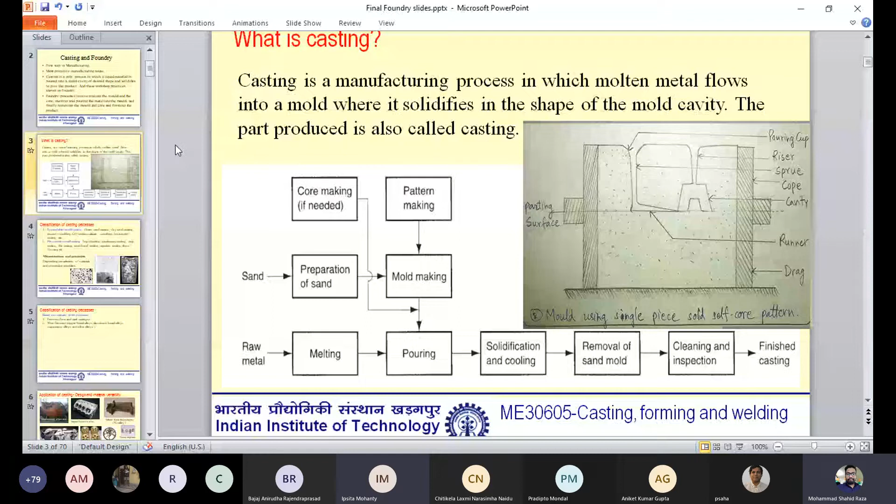Got it? So can we play the video right now, because I think students will understand easily if they see the video? Before that, let's show some application part, because there were lots of slides, so we thought we should complete some of the slides, then go for the video. Let's have three or more slides, then we will go to the video.

So now, classification of casting. I told you what we are doing - we are doing casting with the help of a mold. That mold can be permanent or temporary. Temporary means once you make a product, you can break the mold and make a new mold for the next casting. But in permanent mold casting, the mold will not break after each cast product - you have to keep it.

And how does this happen? This can only happen when you select a mold material which has a very high melting point, and the cast material has a relatively much lower melting point, so it will not damage the mold, and it is also easy to take the material out of the cavity. If you can take out the material without breaking it, then you can keep the mold.

So on that basis, we have two types of mold: expendable and permanent. Expendable basically uses green sand casting, as well as other molds like CO2 molding, sodium silicate molding, investment casting, etc. In permanent, we have continuous casting, ingot casting, strip casting. These are the casting processes that industries follow for continuous or large batches of products.

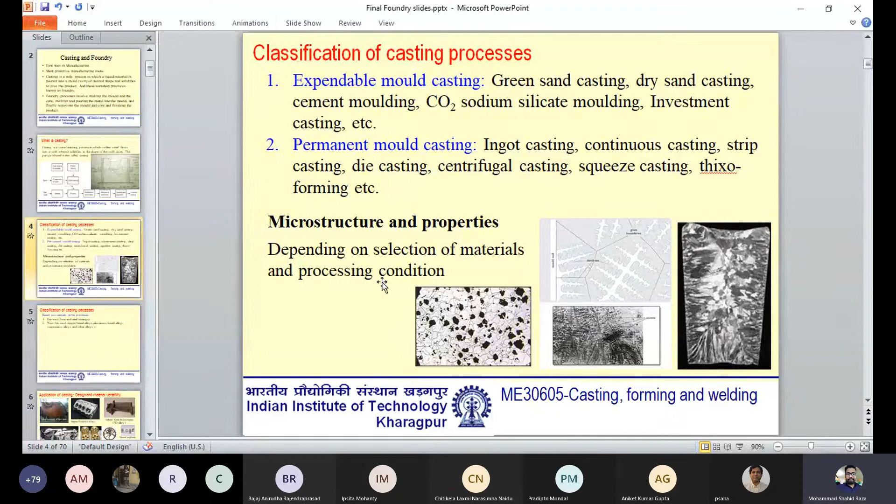Now, previously I told you casting can be divided into two parts based on mold. Now, based on the raw material you want to cast, we have two types of casting: one is ferrous, based on iron and steel, and the other is non-ferrous, like copper, aluminum, etc. For your class, we are going to cast an aluminum-based product.

Now see the applications - just look at the size of the product. If it's a dental implant, it's very small. If it's a pump housing, it's quite big. So the range of applications of casting is quite vast. The product size varies from very small to very large, and the product quantity varies from a few numbers to many numbers. So it has a lot of applications.

Even if it is a primitive process, why are we going to make so many products using casting? Just because... please mute your mic. Please join the modules, both of you, and mute your mics.

So these products have large variations, but still we go for casting because it is economical - it practically gives you your desired product at an affordable price. So we are going for casting.

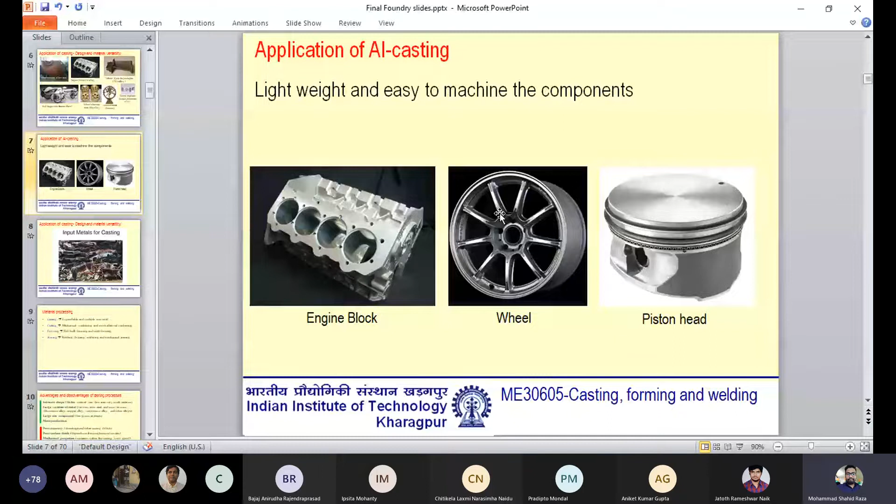These are again some applications of aluminum casting, where the wheel base is made through casting, along with the piston head, engine block, and all these parts.

Now, if I ask you how you get raw material for casting - you can say, sir, we know about mining of metals, like iron ore mining, aluminum mining. From there, the oxides of the metals are present, and we do some reduction process, and finally you get the final raw material for casting.

As well as recycling - in casting, we can use recycled product after purification, obviously, and use it for making another product. This is also a good aspect environmentally - you are recycling the materials, and that will decrease the load on the environment.

Now, material processing. This is a common step to help you understand how other processes are related to casting. So casting, basically, we use a mold to make a product, but that product may not be exactly what you need. There may be some dimensional error, so you can go for cutting. How you can do cutting mechanically, like you did during the lathe experiment, you decreased the length of the job. Cutting operations are always there, and non-traditional machining is also a part where you can do cutting, like laser cutting.

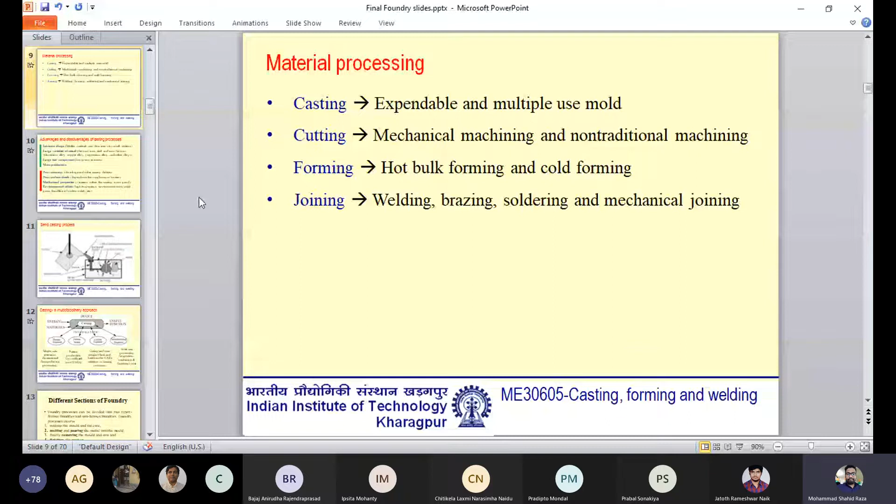Now, advantages and disadvantages of casting. As I told you, whatever pattern you keep in the mold -- that pattern may be very simple, or it may have a very complicated shape. You can have 5 parts added in the pattern, belonging to 5 parts -- that also you can do. So intricate shapes can be formed.

Let's say you have to form a shape which is very complex, and I ask you to do it through machining. Maybe you can do it through machining, but that will be very difficult, and damage of parts can also take place. Why? Because the shape is somewhere very thin, somewhere very thick, somewhere the strength is very low, somewhere strength is very high. So once you machine it and apply pressure, it can get damaged.

But in case of casting, that is not the case -- the material is in molten form, so whatever shape you give, it will form. Again, large varieties -- I told you, you can have very small to very large sizes, and you can select any material. Large size components, again the same point, allow mass production. So these are the advantages.

Disadvantages: poor accuracy. Why? Because of shrinkage and casting defects. Shrinkage -- as you know, any material that gets heated or has its temperature changed will either expand or contract. This is always there because it has a coefficient of contraction and coefficient of expansion property. It means temperature change will change the size, although it may not always be visible to you.

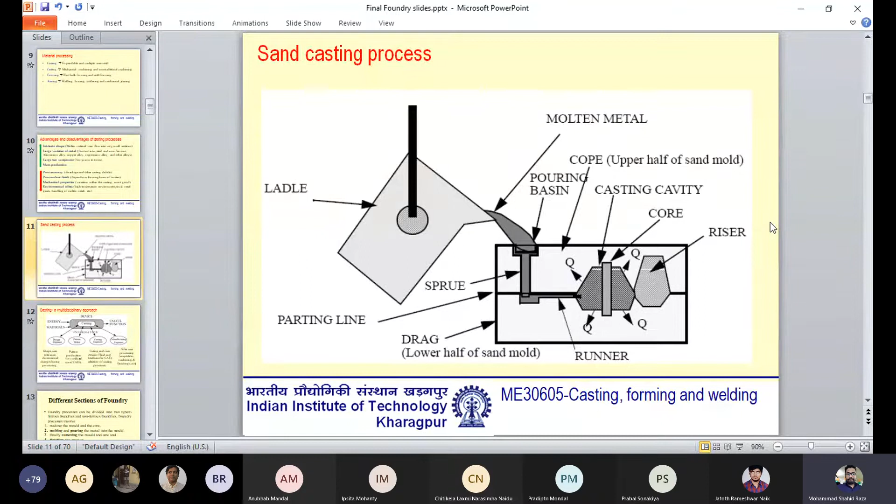We can come back again to the riser. There are riser slides.

Casting is a multidisciplinary approach. If we are going to cast a material, we need a design engineer who will tell us the shape and size of the casting or how the dimensions can change. The contraction amount is this much, so add 5% or 6% more to the size of the pattern to compensate for the dimensional changes. The pattern maker will take the data from the design engineer and make the pattern. That pattern can be made through different materials, and it is given for the casting process. Then the casting engineer will design the mold and its gating system, how the heat transfer will take place, and how we can place the core, whatever is required for the process.

At last, after the casting process is complete, the manufacturing aspect comes into picture, and we do the machining, finishing, and inspect the material for any type of defects. This is the chain through which a casting goes through.

Now, different sections of foundry - ferrous and non-ferrous - we covered. The foundry process involves making the mold and core, melting and pouring the material, and finally removing and finishing the product. This is like the previous slide only.

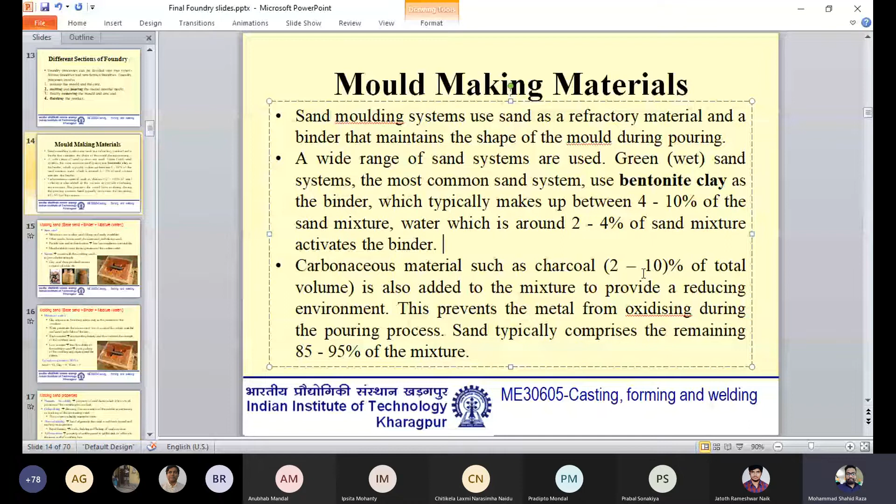Again, what sand are we using? Silica sand. Why? It's cheap and easily available. Other sands are also there. Why do we use sand? It's a ceramic type of material and resists very high temperature. We should know that it resists very high temperature, and the molten temperature of the material is high, which is why it's a good choice for the mold material.

Binder - clay, cement, organic oil - a lot of binders are there. This is self-explanatory; you can understand this slide. Moisture, again, water - why do we need water? So that it can act as a binder between clay and sand.

Increases the content, does reduce strength. High content, lower strength; lower content, less flowability. So this is okay.

Now molding sand properties. Once you prepare the molding sand using water, clay, and sand, it has some desired properties like plasticity or flowability. What is that?

Once you start ramming, or once you place the sand in the box, it should flow into all portions of the box. That property is called flowability. How can you assure this? By applying pressure with the help of some material, called a rammer.

Collapsibility means allowing free contraction, or a method to avoid tearing or cracking of the contracting material. When the material starts to contract, it should help it contract and should not get stuck with the material. So that we call collapsibility.

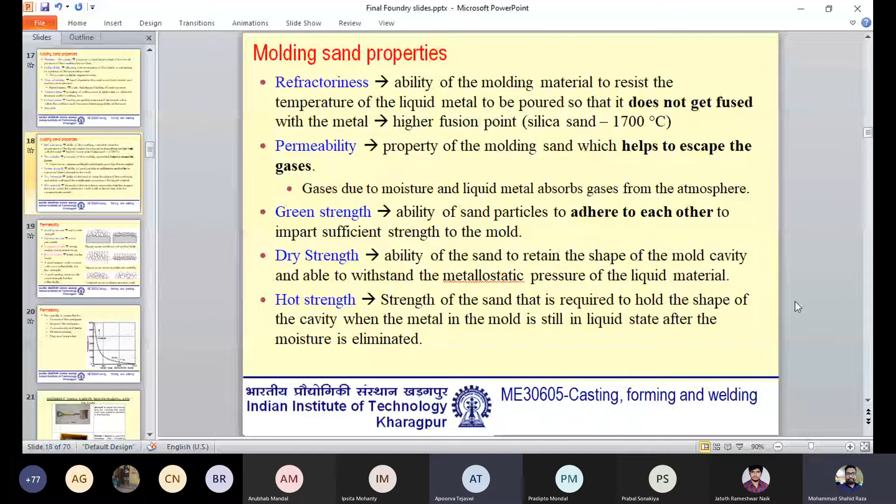Question: how is adhesiveness used? Meaning, if we pour the molten metal in the mold, how do the sand particles stay in place? See, once you pour the liquid material in the box, what happens? Immediately the moisture in the sand particles present in the periphery will evaporate.

Once it evaporates, that's where the liquid metal's property comes into picture - dry strength, meaning it should not collapse once you place liquid metal inside it. The property of sand is such that when it dries out, it can still hold its shape and size. Because once you place liquid metal, what does it mean? It means the moisture will go out.

Moisture will go out, then what will remain? Clay and sand will be there. So that binding property of clay has been activated through moisture. It happens like that only - once you place moisture or water in it, the binding property between the sand and clay gets activated. So clay at that point acts as a binder between different sand particles.

Again, permeability - these are the various ways you can change the permeability of a material. A bigger grain results in worse surface finish, a finer grain gives better finish, but permeability will be less. Like that, you can play with the size of the grain to get a desired permeability.

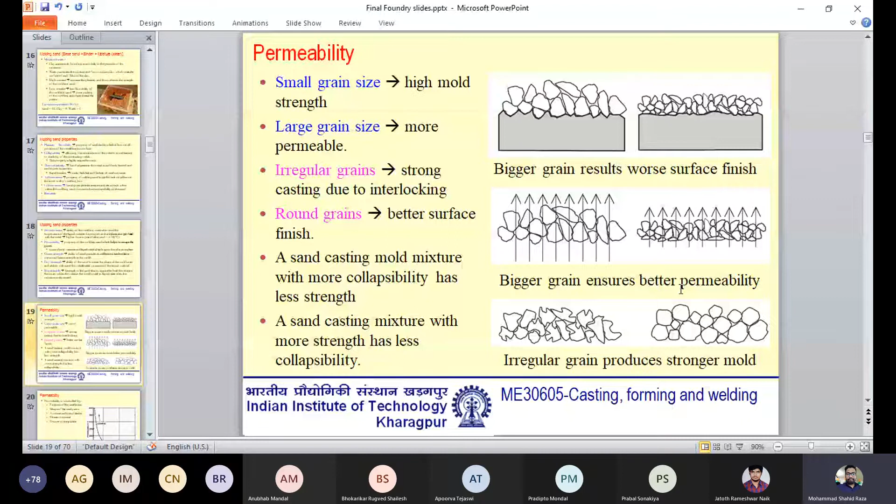Now, to go into these slides with different tools, let's go to the video, because these tools will come into picture there. Now we are switching to your actual lab work, what you are going to do in your lab, because previous batches used to do it themselves, but for your batch it is difficult. So these tools are required for the actual experiment. Let's go to the video, there you will find these tools and their applications.

Then we will come to the pattern design slide. By that video, whatever we studied right now, those things will get clear. Then we will have a small 5 to 10 minute question and answer session. If you think something is still not clear, we will go over that, and then we will come to pattern, because that part we can conclude using pattern design and gating design as well as some defects.

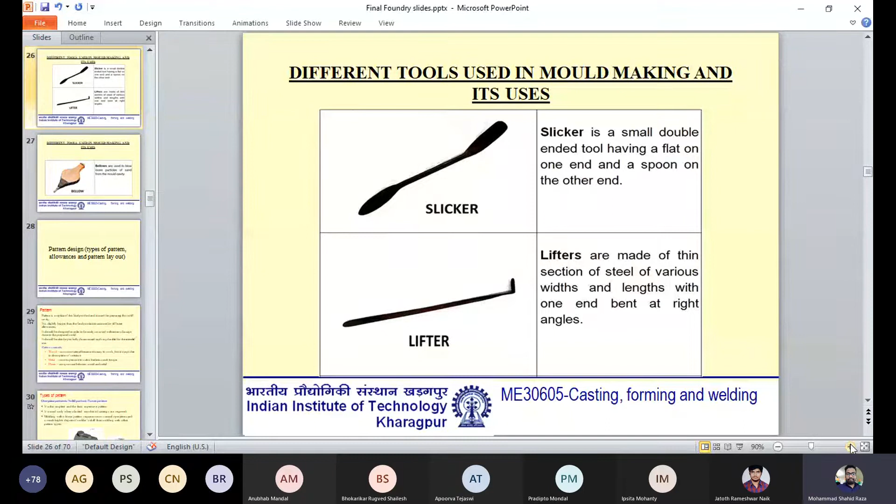Okay, so these are various tools which we are using. Bellow is one of the tools. Slicker, lifter are different tools. The applications, once you see, then you read it, you will understand okay, this belongs to these.

You just see the dowels. Dowels are important because these two will make way for, one is the sprue and one is riser. You saw the cross section, na? There was a riser zone, there was a sprue after pouring basin. So those two will be made.

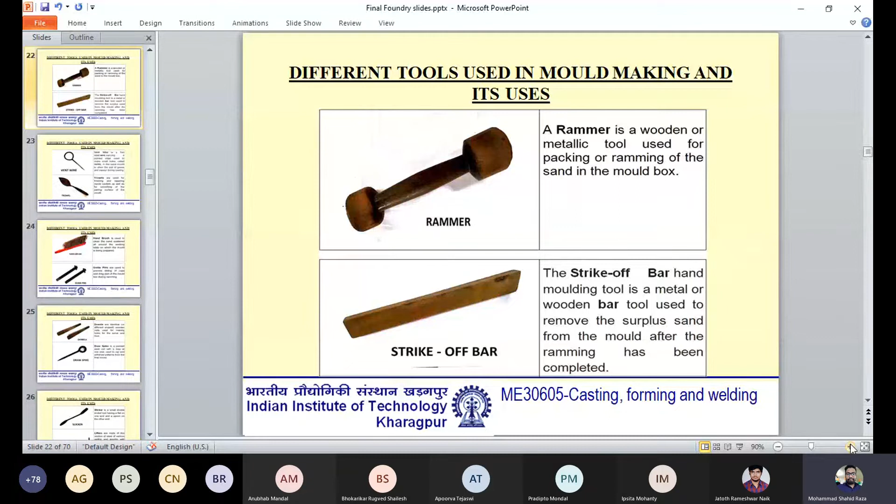Brushes, guide pins, what is the application of guide pins? We will see, these are small tools. So rammer, why are we using rammer? Why are we using a strike off bar?

Why are we using a sieve? I told you the mesh size, how to decide mesh size. This sieve we will use to decide the mesh size. You want a particular mesh size of sand, use that type of sieve only.

So let's go for the video part now. This we will again come back to.

Can you see the video right now, students? Yes sir, yes sir. Sound is coming? No sir. Okay, no sir.

In this video it shows 1 hour 8 minutes, but this video constitutes three casting mold making processes. Out of three, the first one we can play in total so that we can understand the different procedures. For the second and third, we can skip through the process so that within the designated time we can complete it in about 20 to 25 minutes, and then we can go for our slides. So have patience, see the video. I think through the video you will understand most of the things, and whatever remains we can discuss.

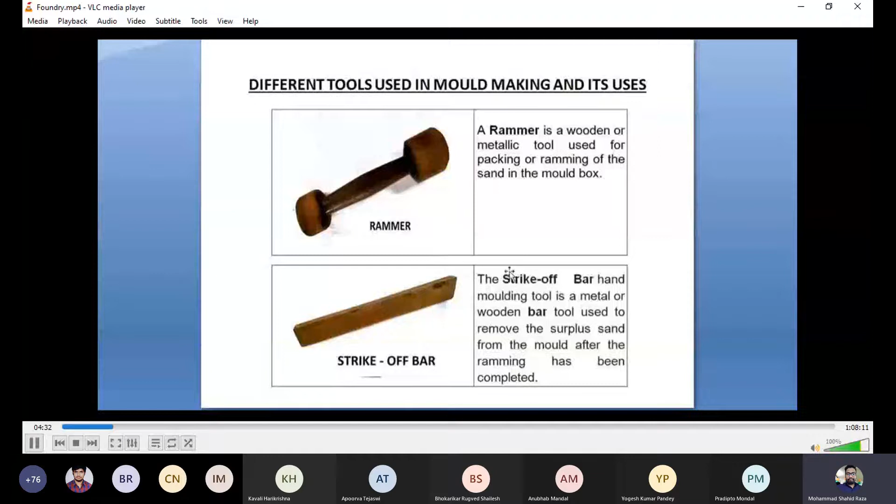The next tool we will use is the vent wire. The vent wire is a thin wire with a pointed edge, used for making vent holes. The name 'vent holes' comes from ventilators, which are present in our rooms for the exchange of air.

When we pour the hot molten metal at a few hundred degrees centigrade into the mold, and the mold has moisture in it, the high temperature of the molten metal causes the moisture to evaporate. Large amounts of vapor are generated which need to be vented out, so to help expel the gases generated, vent holes are made.

These holes are made to puncture only the backing sand layer. We can't afford to puncture the facing sand, otherwise the mold cavity will have a direct connection with the outside atmospheric air, and when we pour the molten metal, it may leak out through the vent hole. Hence, care must be taken when making vent holes, as the depth should only puncture the backing sand layer.

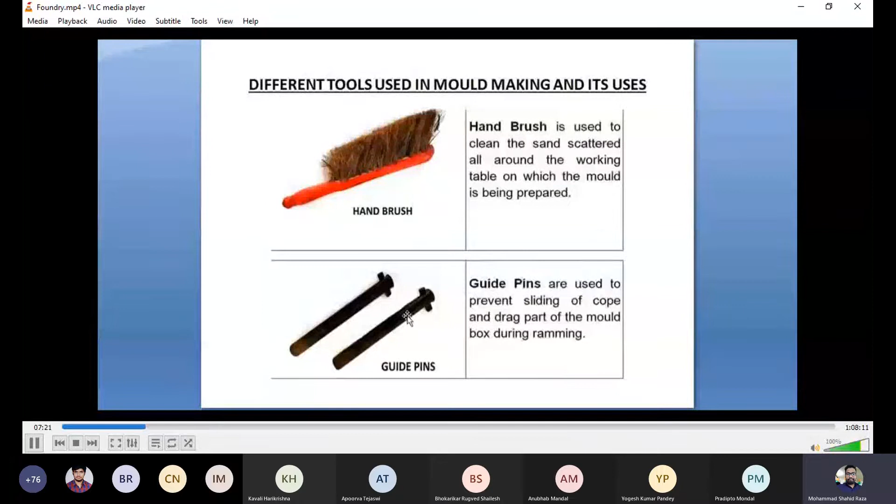These pins are called guide pins. The guide pins necessarily help us not only in guiding or preventing misalignment, they also guide our hand movement when we go to place one box over the other.

The next set of tools is called the dowel pins. These are the sprue pins. One is used as a riser pin and the other is used as a sprue pin. The function of the sprue pin is that it is the hole through which we pour the molten metal, and once the molten metal enters through the sprue hole, it connects to the mold cavity through a horizontal passage, which we call the runner.

The molten metal goes to fill up the mold cavity, and if we continue pouring, the molten metal starts rising into another hole placed over the pattern. Since the metal in this other hole rises, this hole is called the riser pin.

The next tool is a metallic iron tool with the end pointed in the shape of a spike. It is used for withdrawing the pattern out of the mold. Since it is used for removing the pattern from the mold, the purpose is withdrawing the pattern, and the shape of the tool is a spike. So from the word withdraw, the word draw is taken, and from the shape, spike, the tool is called the draw spike.

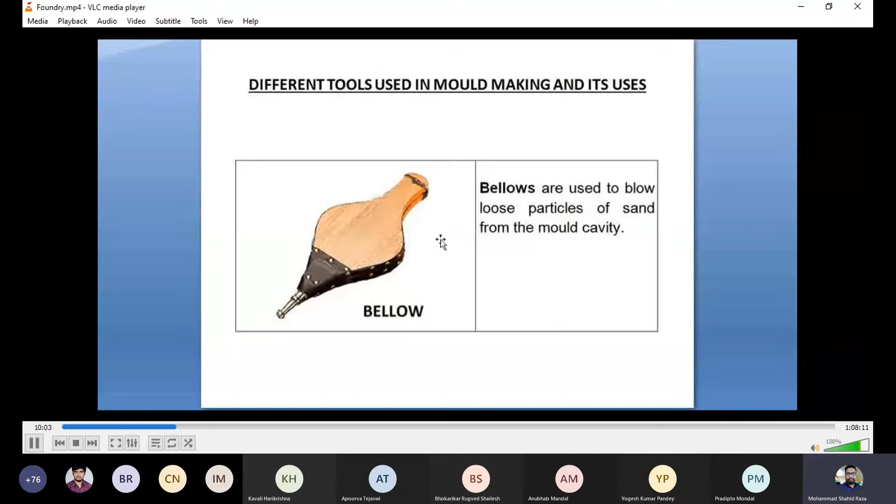The next tool we use is the bellow. The function of the bellow is to blow air into the mold cavity. A gust of air at high speed is directed into the mold cavity, so any loose sand particles that have accidentally entered the mold cavity are blown away with the help of the bellow.

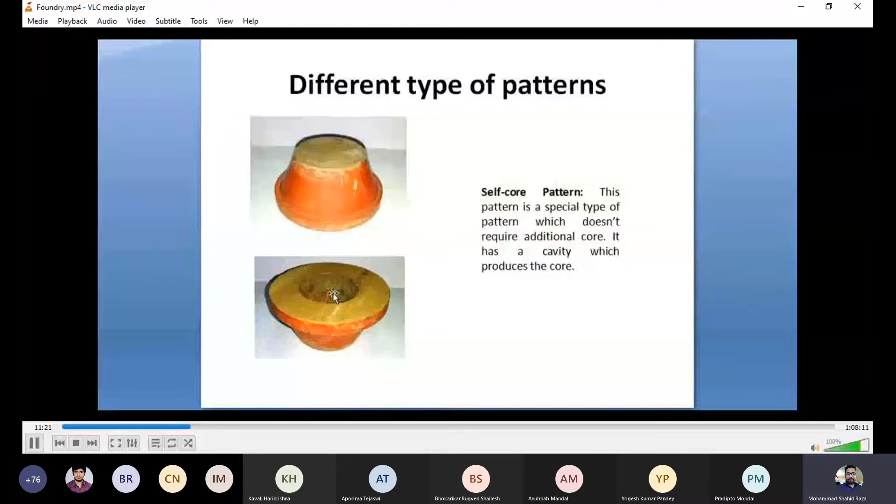Next, for this particular view we are not able to see the cavity present in the pattern. It appears as a solid piece, but since it has a cavity, it is going to generate a cavity in the cast object. The casting will resemble this shape with a cavity in it, generated by some sand in the molding mixture. This sand, corresponding to the cavity, creates a hole in the casting. This is what we call the self-core pattern.

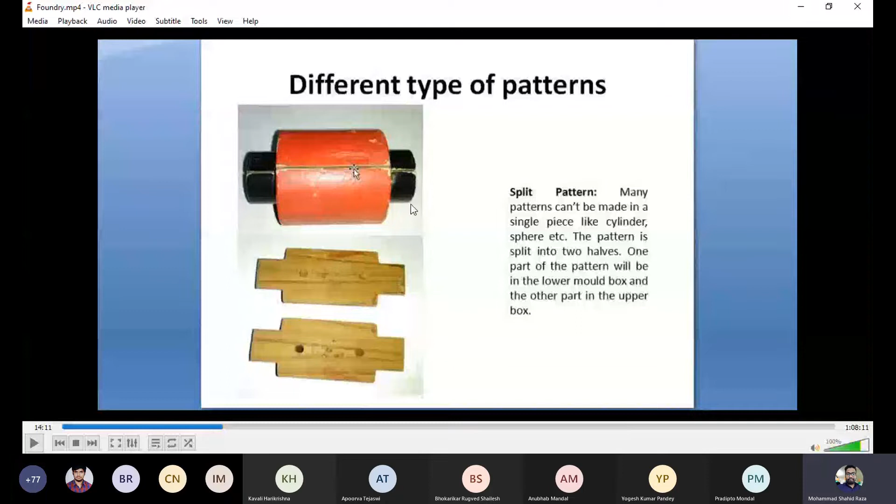Now the sand part is there in the center, so there will be no liquid in this center part - only the periphery part, the liquid will flow up to this much thickness. Got it? So the final product will be a cylinder with a hollow central portion. See the other parts of the video and try to understand.

First, this shows the assembly of the mold boxes. See these two parts you can see right now - this top part we were calling cope, the bottom part we were calling drag. So this is the molding box. I showed you a cross section before - that cross section was of this box only, in this plane.

If you cut these two boxes in this plane, let's say horizontal, you will get that cross sectional image we showed initially. So just see how they are making the mold and how they are using the pattern - one at the bottom and the other at the top. The bottom box is called the drag box and the top box is called the cope box.

Initially, to start the mold, we place the drag box in an inverted position. After doing so, we place the solid pattern. Why is it called solid? Because it does not have any cavities in it. The solid pattern is placed inside the mold box, slightly offset from the center.

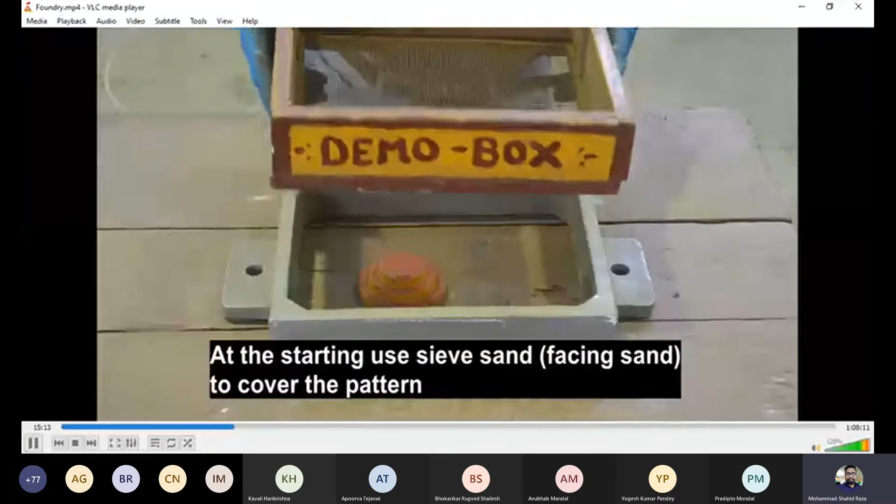Thereafter, after placing the pattern, we put a fine layer of sieve sand into the mold box. The purpose of adding a fine layer of sieve sand is to have the pattern covered by fine grains of sand, which when compacted will give a good surface finish of the mold cavity. We are intentionally eliminating the larger lumps of sand particles, and thereby filtering only the finer particles.

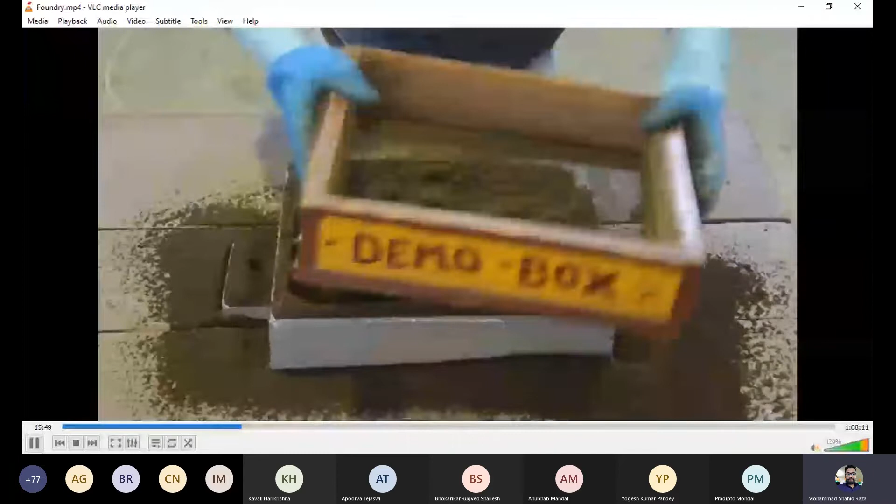When this finer particle molding sand mixture is compacted, it gives a good surface finish of the mold cavity. A good mold cavity surface finish ensures that when we go to add molten metal, the cast surface of the mold is smooth. So the first reason why we add the fine sieve sand is to have a good surface finish of the casting.

Now, this layer of sand, when compacted, is the layer which comes in contact with the hot molten metal. Since this is the layer that faces the hot molten metal, it is called the facing sand.

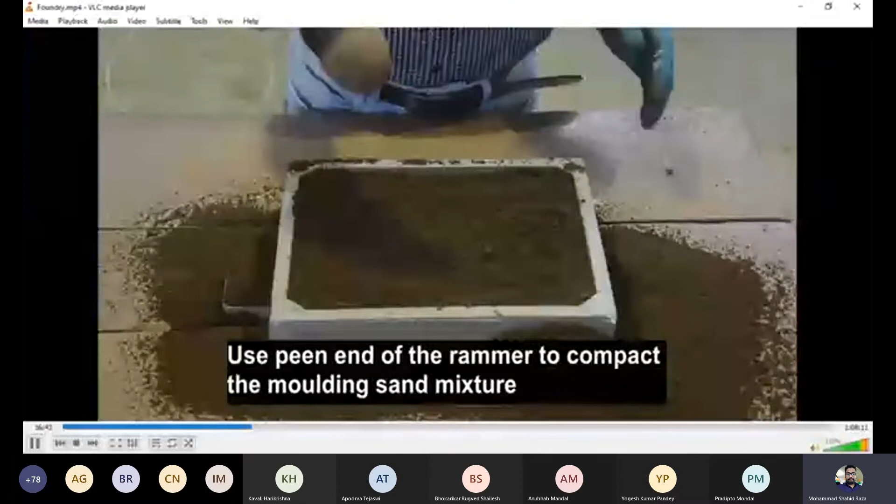The sand particles are first distributed evenly before we start compacting the mixture. These sand particles have a layer of binder with moisture on their surface, giving them stickiness, but until they are compacted together, they won't bond with each other and hold together. So the first layer, the facing sand, is compacted.

We start the ramming from the inner edges of the box and gradually proceed towards the pattern. When compacting the sand mixture, we always try to maintain a uniform force so that the extent of compaction over the entire surface of the mold is fairly uniform.

After compacting the first layer of sand, we directly add sand from the molding mix, which is not sieved. This sand is called the backing sand. Backing means providing support - it supports the facing sand layer. This sand does not come in contact with the molten metal, and hence has no function as far as the surface finish of the casting is concerned, so we add it directly.

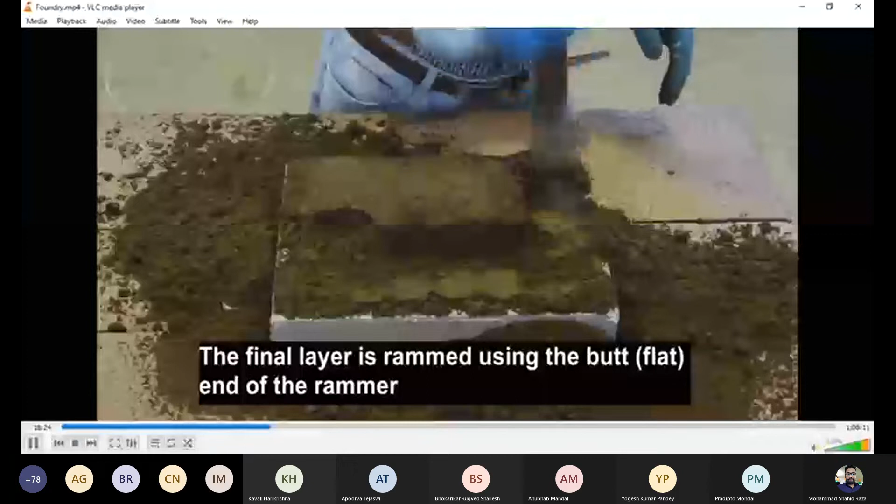Here you can see we are adding another layer of backing sand into the mold. We intentionally keep it clear, and before we start ramming, we distribute the sand uniformly, then start ramming with the other end of the rammer, the blunt end, which is called the butt end. The reason is we'd like to have a uniform surface.

But despite having rammed it, we don't end up with a surface which is flat enough. Hence, to make the surface uniform, we need to strike off the extra layer of sand projected on the mold. The tool used for removing this extra layer of sand is in the form of a rectangular bar. Its function is to strike off the extra sand, hence it is called the strike off bar.

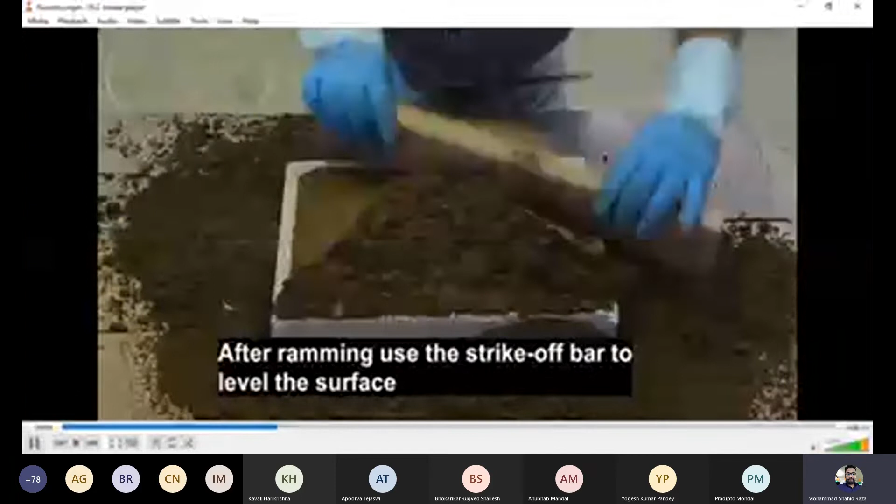This operation gives me a flat surface on the other side, the drag box side of the mold box. After using the strike off bar, we use a tool which we call the vent wire.

The function of the vent wire is to make holes in the mold. This facilitates the escape of gases from the mold when we pour the hot molten metal into it. Hot molten metal, poured at around 800 degrees centigrade, causes instant evaporation of moisture and decomposition of the mold binding material. So the gases generated at high temperature need to be vented out, and this is facilitated by making holes in the mold which are not too deep.

They only puncture the backing sand layer, but not the facing sand. Had they punctured the facing sand layer also, it would have led to leakage of molten metal through the fine holes. So these holes help the escape of gases from the mold. We call this property of the mold permeability.

Now we have inverted the mold box. This drag box has certain impressions of the table on its surface, so we even out the uneven portions and make the surface even by using a tool which we call the trowel.

After we have leveled the surface, meaning the parting surface between the two boxes is leveled out, we are going to place the other half of the mold box. This other half is going to come and rest over the lower box, which is the drag box.

When we place the second half, the cope box, we have to prevent it from getting displaced with respect to the drag box. To prevent that, we use guide pins. One guide pin has been placed into the hole along with the other half of the other guide pin. This prevents misalignment between the two boxes.

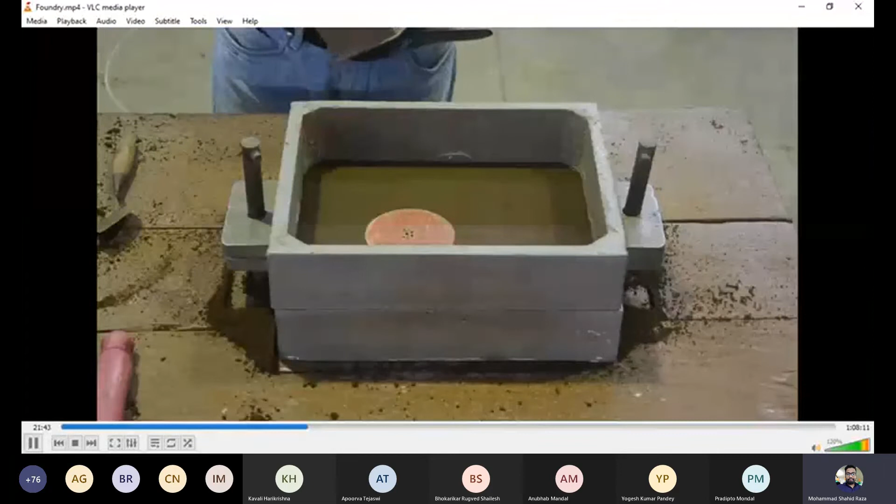After doing so, and before we add a fine layer of facing sand again, we sprinkle a layer of dry sand on the surface between the two boxes, on the surface of the drag box. This dry sand layer deters the two boxes from adhering to each other.

The layer of sand in the drag box has binder in it, and the other layer we are going to add will also have binder. So when we compact the two boxes, the molding sand in them would otherwise stick to each other. To prevent this sticking between the molding mixtures in the two boxes, we sprinkle this dry sand, which helps in the separation of the two boxes. Hence this dry sand is called the parting sand.

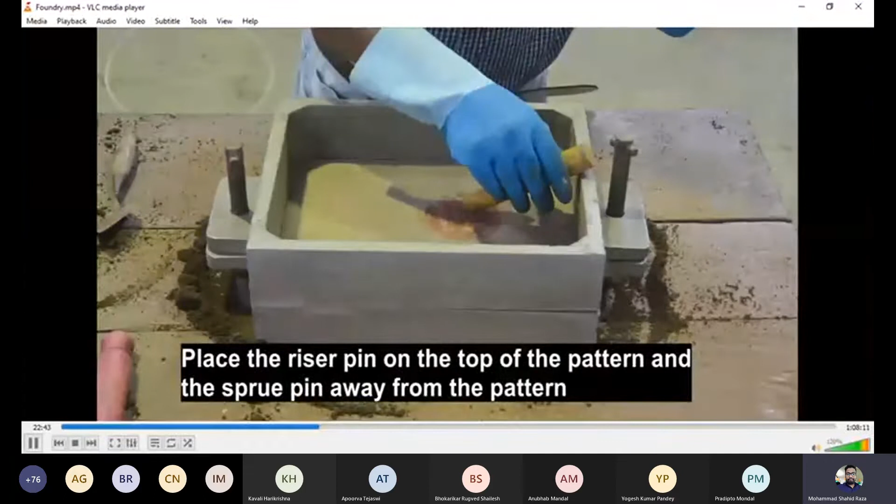Once we have sprinkled dry parting sand over the parting surface, we next place the provisions for introducing molten metal into the mold. One pin is placed over the pattern, and this pin is going to serve the function of a riser hole.

We'll explain in the subsequent class what a riser hole and a sprue hole are. The other pin that we have placed away from the pattern is called the sprue pin. That is going to generate the hole through which we'll pour the molten metal into the mold.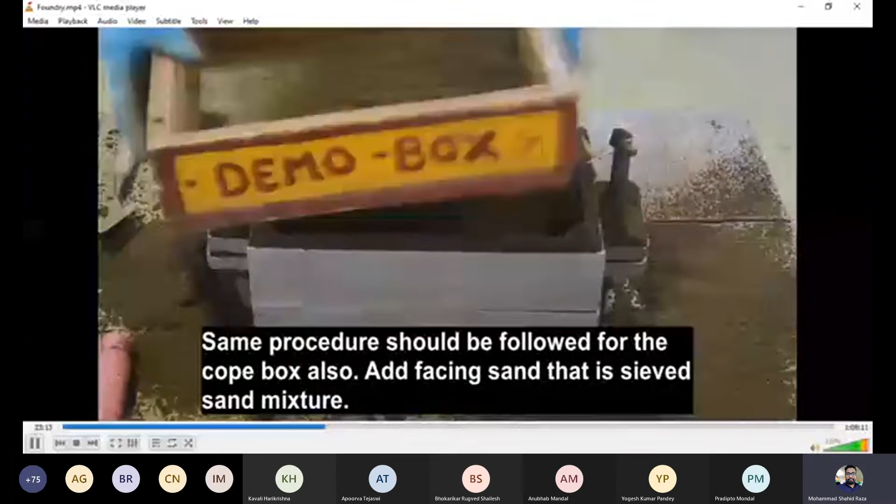After this, we again sieve a fine layer of sand into the box. Why do we need this again? Because this layer of sand is also going to come into contact with the hot molten metal, constituting the other surface of the pattern. Hence this surface of the mold box also needs a good surface finish, and to achieve that we only use fine particles of sand.

Now we try to make the pins stand straight or erect by pressing the sand around the base of the pin with the fingers. After doing so for both pins, we are going to compact the mixture.

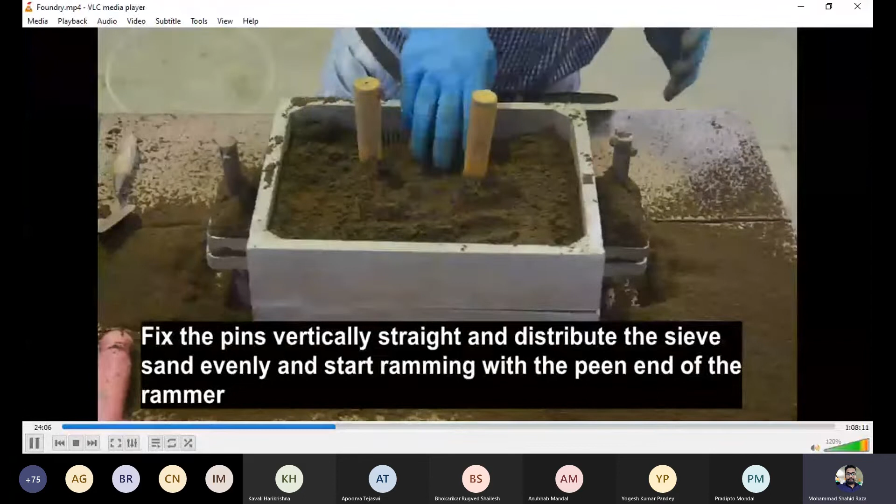Compaction of the mixture is done by an action called ramming, using a tool called the rammer. The end of the tool has two different shapes: one sharp and one blunt, as seen for the first box. The pointed end has a smaller area, so for the same force applied, the pressure onto the sand is greater. That's why the peen end of the rammer is used.

Up to here, in the cope box he put two pins: one for the sprue through which you pour the liquid metal, with a channel made between the sprue and the cavity, and the other is the riser placed above the pattern. Now he will again add the facing sand as before, do the ramming process, then add the backing sand, and use the strike-off bar to remove the extra material. I'll skip those repeated parts and move to the next.

Initially sand is added around the box, gradually working towards the center, then directly adding the next unsieved layer of sand, the backing sand.

On the edge of the box, since there are some depressions in the mold, the unsieved layer of sand is used there. Now, using the butt end of the strike-off tool, the surface is cleaned up to separate out the top neatly.

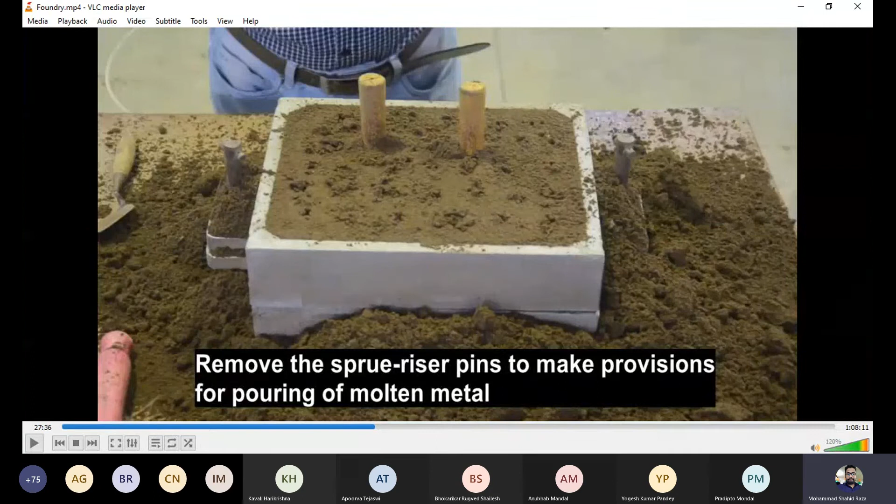He did the venting process. Now he will remove these pins and move on to the next step, making the surface neat without any sprinkled molding sand left.

After doing so, we would separate out the two boxes. On separating them, the part of the pattern embedded in the drag box becomes visible. This pattern needs to be removed from the mold box.

This depression has come because of the pin of sprue, and now we have to connect this. We will remove this pattern. We have to connect it using some gate arrangement. Okay, so see how he used to do it.

Now we use a tool which has a pointed spike end. This is the tool which is being used. It has a pointed end, and now it is rammed into the pattern, and thereafter it is rapped from the side to make the hole or free the pattern out of the mold.

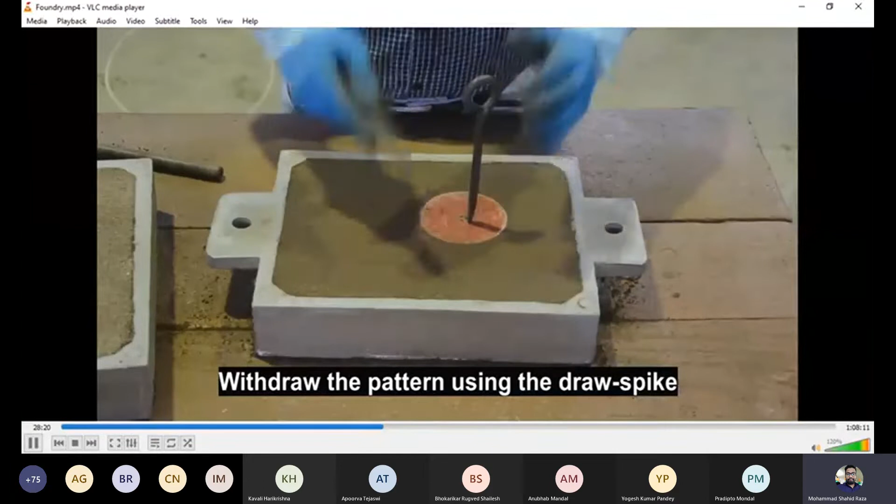After doing so, we very carefully and slowly lift out the pattern. Thereby we generate a neat, clear impression of the pattern in one of the boxes. This particular box which you can see, this is the drag box.

After withdrawing the pattern, we have to cut a channel that connects the end of the sprue pin with the mold cavity. This operation is necessary so that the molten metal that is poured through the cope box, through the sprue hole, finds a passage into the mold cavity.

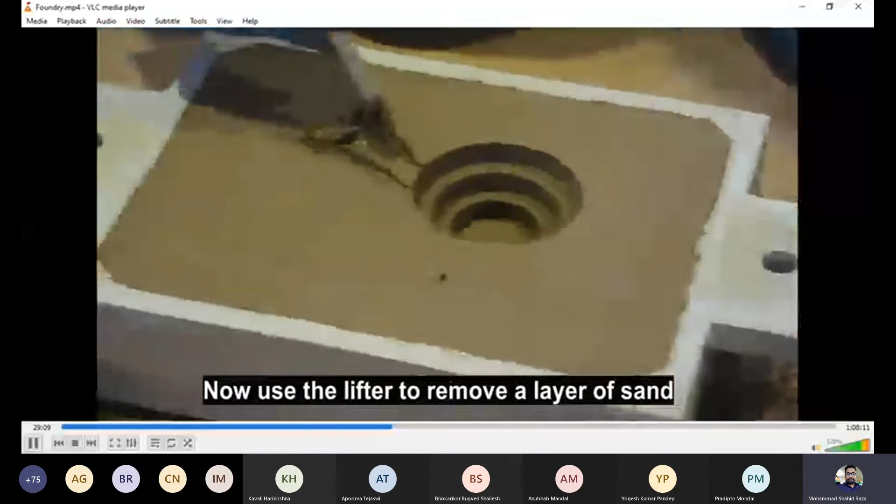The tool that we have used initially to mark that shape, a tapered shape, is called the slicker. After the slicker has been used carefully, care is taken to use another tool to lift out the sand mixture from the mold box. This tool is what we call the lifter.

Why is it called lifter? Because it lifts out the sand mixture. Care is taken to prevent any loose sand from getting into the mold box, into the mold cavity. Not only is care taken for preventing this, we have to ensure that there are no loose sand particles into the space.

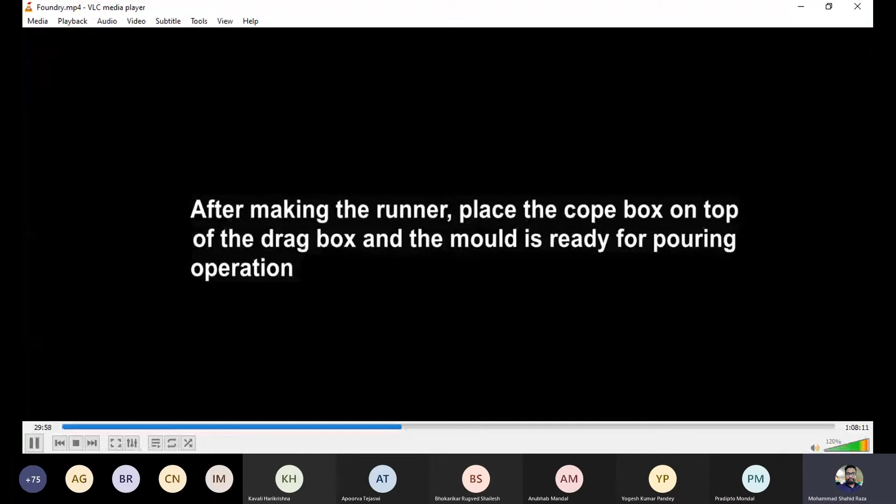Okay, this completes the first part, the solid pattern. Now we will go for the self-core pattern. If you remember, at the start of the class one of you were asking about the self-core, how it has been placed in the cope. In the video we saw just now, the pattern was placed in which part, cope or drag?

Now in this second case, we are going to place it in the cope part. So there is a difference. Just see the difference and we will skip the video.

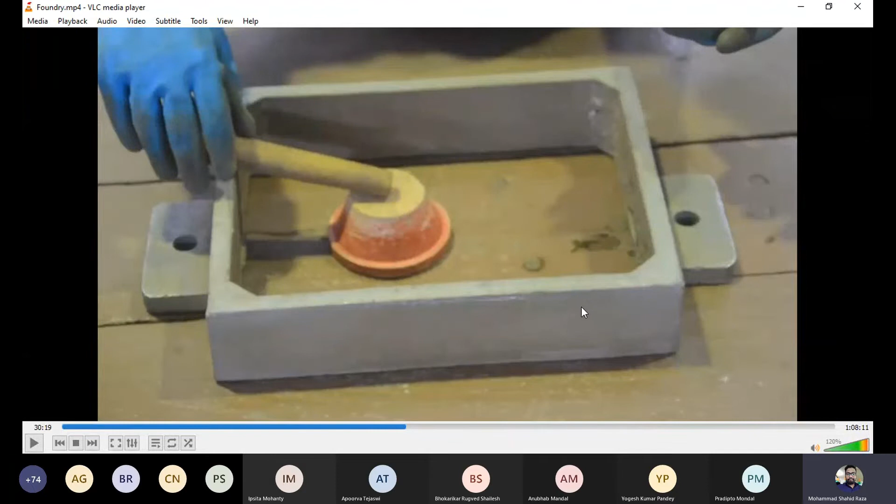We initially take the mold making with self-core pattern. To start the mold making, we take the self-core pattern and place it along one of the diagonals. This box is different from what we saw in the previous video. This is the cope box, the topmost part, whereas earlier we worked on the drag box. So initially we worked on drag, then cope; now we are working first with cope.

We place it with offset from the center of the mold box, along one of the diagonals, a little bit offset from the center.

Now, considering that it becomes the mold, for filling we put the backing sand. The first tool that we have used after compacting is used to strike off the external sand.

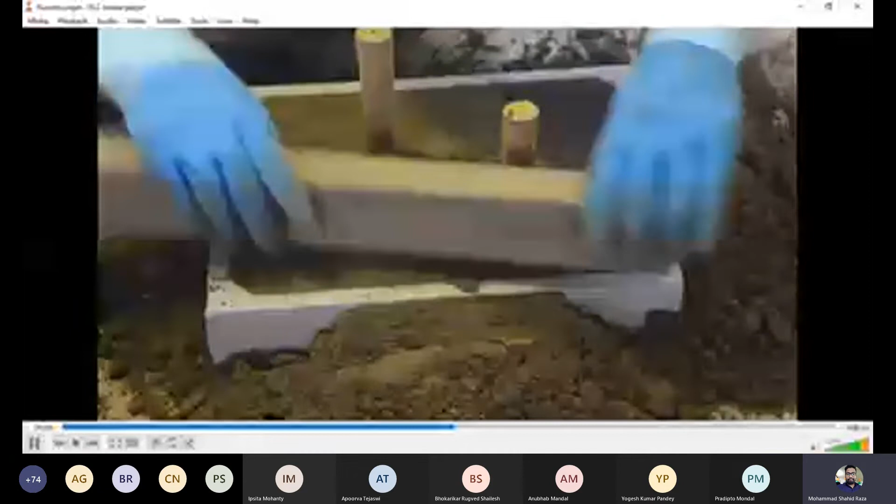And what is the shape of the tool? The first tool was for joining the holes, the molds and pockets which liberated gases, hence they have to be liberated out, so we used vents. Remember, these vents should not go to puncture or reach the surface of the mold, otherwise molten metal will leak out from the mold.

Hence we use the vent wire, the tool that is used for making the vent hole, and it does not go to puncture the mold cavity, only the backing sand layer and not the facing sand.

We are showing you the holes. What is this hole that we have just made? You can see clearly, that's called the sprue hole. Why sprue hole? Because that is the hole through which we will be pouring the molten metal.

I think the sound and video, those two are playing at different times, no?

One second, excuse me sir. Yes, tell me. Sir, how do we differentiate between the drag box and the cope box? How do we know which one is the top portion, which is cope?

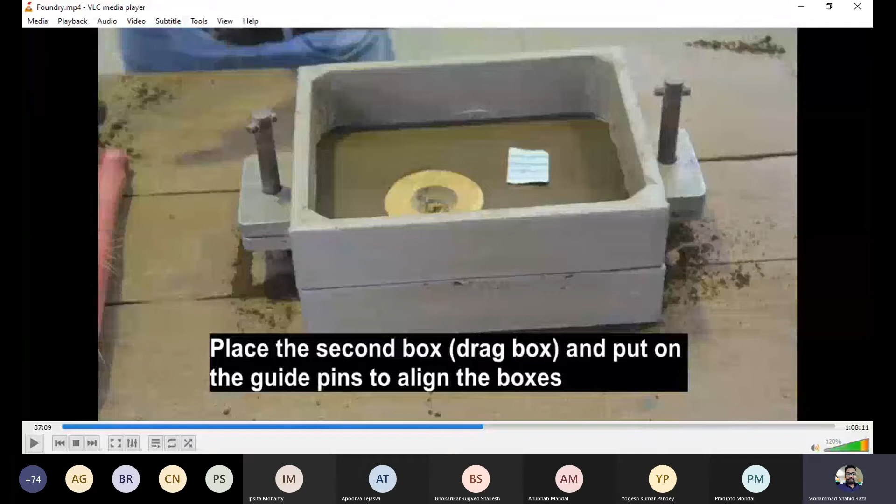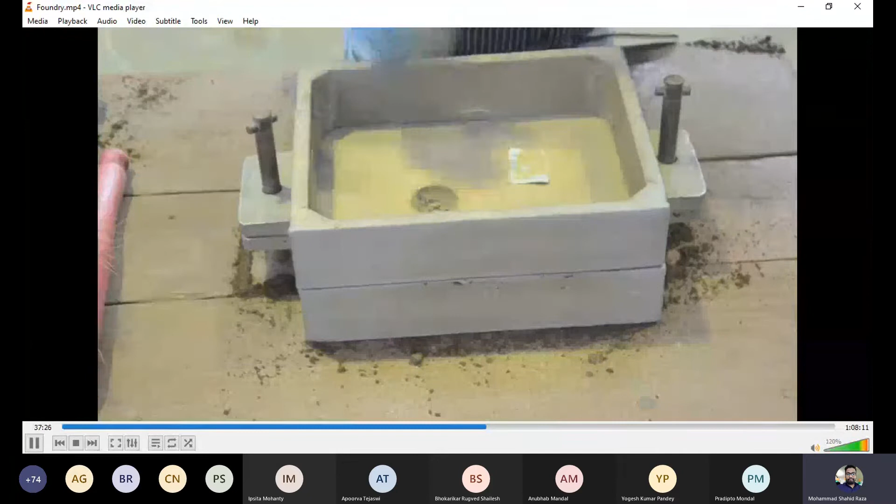Yes, sir. There's an issue with the video and audio. The first video, bottom box audio, if you listen it appears he is putting the parting sand, but what the audio is saying, let's try to understand. That's a cope box that has binding material, and the other sand now what we are pouring also has binding material. These two are different. You got my point? Yes, sir. It is lagging, close. Sound and video are not playing in a coordinated manner. What we can do, we can again play this video from 37.27.

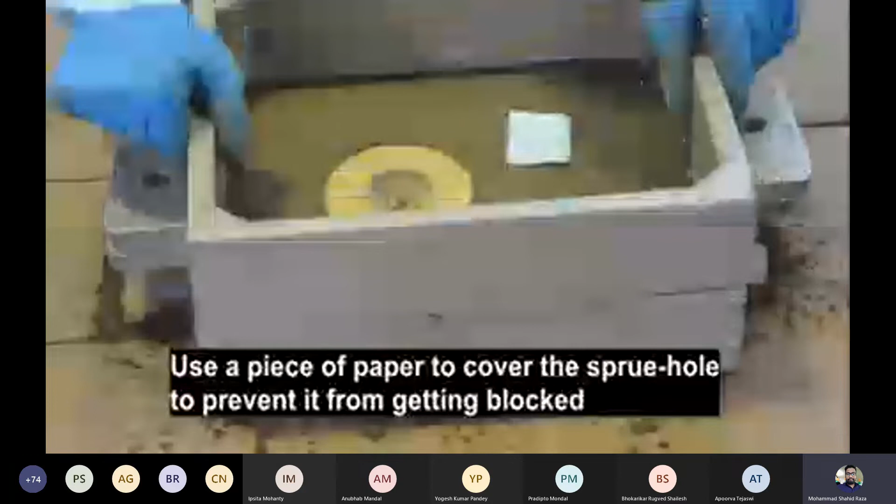That is called the drag box. And the initial box into which we have placed the pattern and wrapped the sand mixture, that was called the cope box. And if you recall, the sand we are sprinkling on the surface is to ensure that the sand we compact in the drag box does not draw a bond with the compacted sand in the cope box.

The reason is: the box is the first bottom box, as it appears now in this configuration. That's the cope box, which has binding material, and the other sand we are pouring also has binding material. So when we compact one layer of sand over the other, both having some binding material, they will bond with each other. We would like to deter these two layers of sand from bonding with each other.

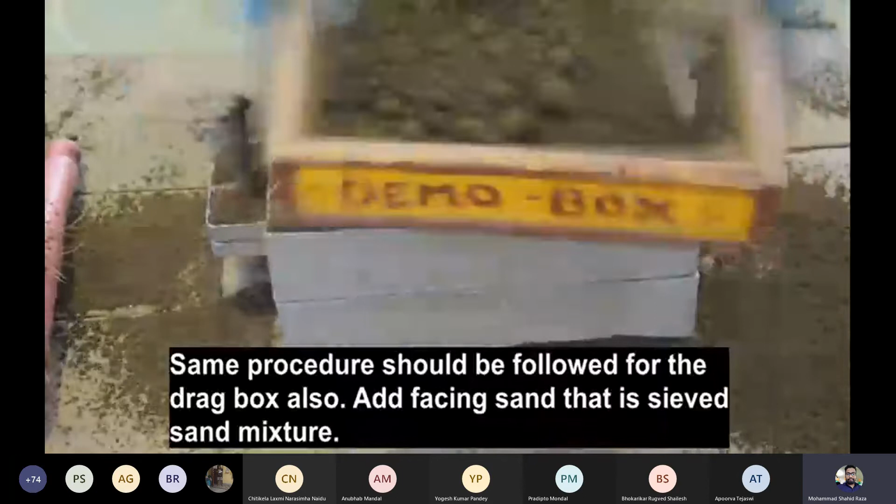And how do we start the molding of the drag box? Initially, in the first box that we have done, we are pouring sand. This is repetition work, placing a layer of sand on top, which goes to cut the molding sand mixture into particles of uniform size, which we attain by using the pin end of the rammer.

We start with a lump of sand using the tool called a rammer. The function of the rammer is to ensure that the individual grains of sand, which are apart, get compacted at the bottom. Next, there are three words we have: one is wire, another is rod, and the other is bar.

If you try to geometrically identify and visualize what their shapes are, they're all cylindrically shaped. In English we have wire, rod, and bar. Let's see some of these aspects - if you try to geometrically identify them.

See over here, whatever cavity was present in the pattern, that cavity got made with the help of sand. So this part will take care of this cavity. How did it get made? Directly by adding sand, so we call it a self core. That's why this pattern is called a self core pattern. Now this box will lie at the bottom, and this will be on top, and we have to make the gating system over here, and finally we will get the final cast product.

Visualize what their shapes are - they're all cylindrically shaped. But what is the variation, what is the difference? The difference is in the diameter. The wires are those which have fine or small diameters.

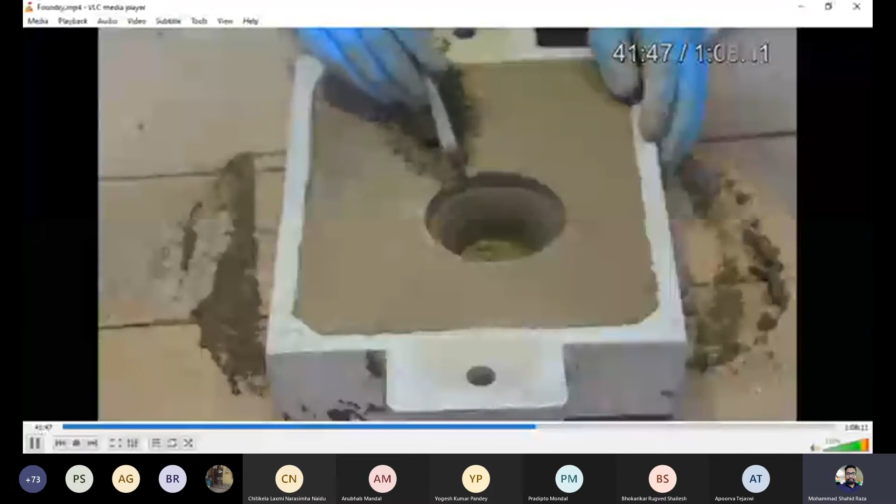This runner was developed from the pattern itself. That is going to generate the cavity inside the pattern, and anything we use in the casting process that goes to generate it, was made by that.

So what is he doing right now? Now he is placing this cope box on the drag box, and from the sprue he is making the pouring basin so that liquid metal can be poured through it. This will be on top, and this was the position of the riser. So he will make a small basin for the riser also, so that the metal can remain over here. It should not flush out from the top.

Next, when we place... see how he is placing the drag box, and after doing so, we place the cope box over the drag box.

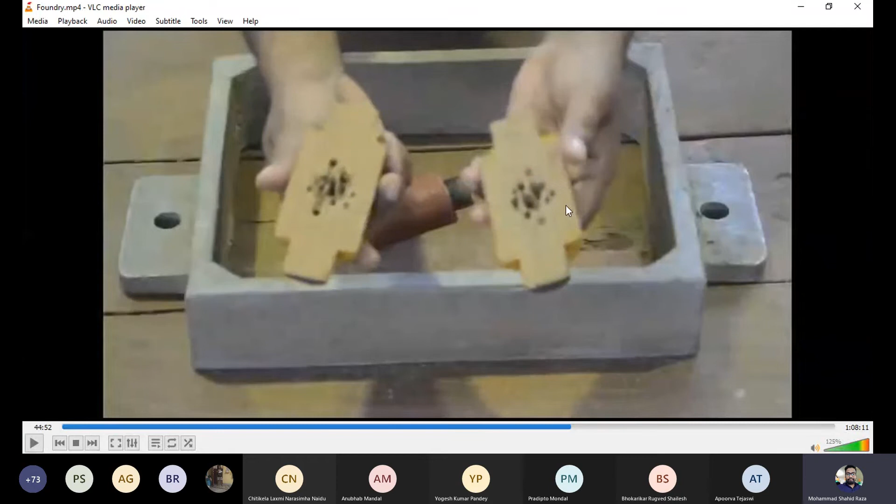This is the sand, using the second half guide pins. Now what he will do, he will put this second part above the first part using this hole and dowel pin, so that both get aligned, and then he will again fill this box also.

After placing the pins, we are going... this pin is the riser pin, and this one is for the sprue. So he fixed the location for the riser and sprue, and then he will do the same process again, so we can skip it.

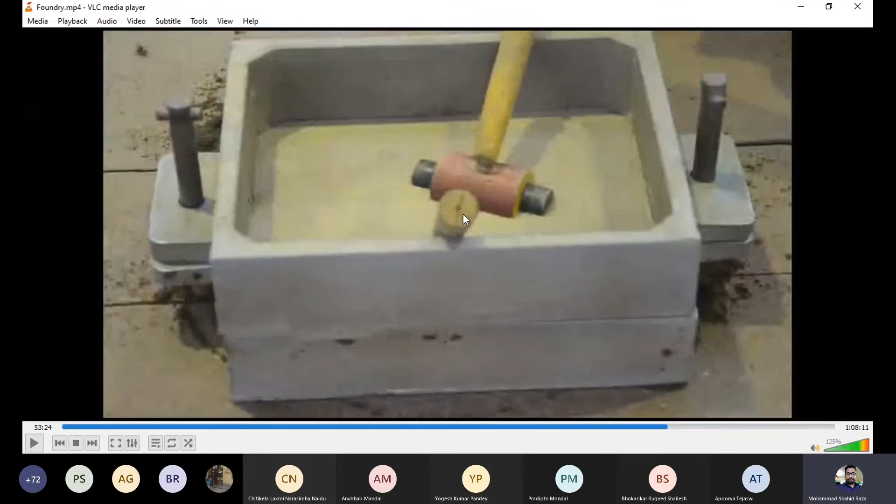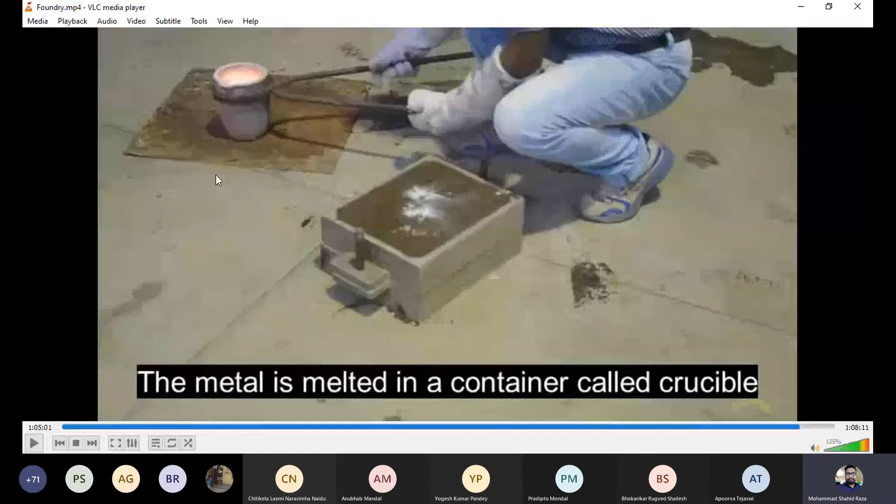He's removing something, which is basically called slag. That slag formation takes place because of the reaction during melting between flux and the aluminium. So he has removed the slag because it is a solid part that will not help in melting, and it accounts for an impurity in the product. The name is slag, S-L-A-G, slag. So he's removing all the slag.

Once he removes all the slag, what he will do is pour pure liquid aluminium into this mold using the pouring basin, not through the riser, through the pouring basin.

This is the riser hole. You can see the shiny material coming out from this. Once it comes out from here, you understand two things: first, that it has completely filled up with liquid aluminium, and now you can stop pouring extra material so that it cannot fall off the surface.

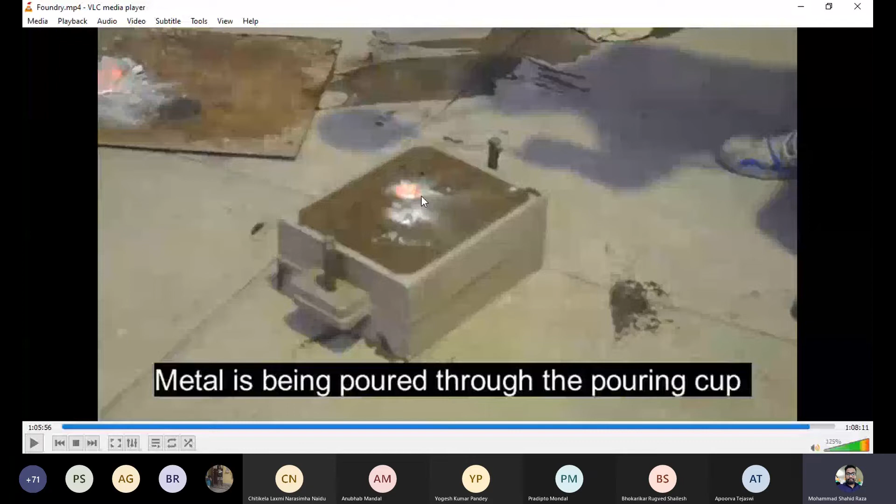So this is a furnace where you are melting the material. Solid aluminium is fed into this crucible, and it will melt. Now after melting, he pours it into the cavity, and it got solidified.

Now he removed both the boxes, and this is one of the mold boxes. What he will do is remove this sand portion from it, and he will take out the cast product.

Second box. Since we are breaking the sand, we call it an expendable mold. Why? Because after getting one product, you crush it, then again follow the same procedure and you will get a product. So we call it expendable mold casting.

Now students, you can see this is our final requirement. You were asking initially what will happen because material will solidify in every portion, in the riser also, in the cooling gating system also. So this is an inverted image. He is holding the material through a riser. This was the sprue, below somewhere will be the pouring basin, this was the runner part, and this is your final cavity made using the pattern. Centrally you place the compacted sand called core, that made the hollow portion. You got it? Notice everything is attached all together.

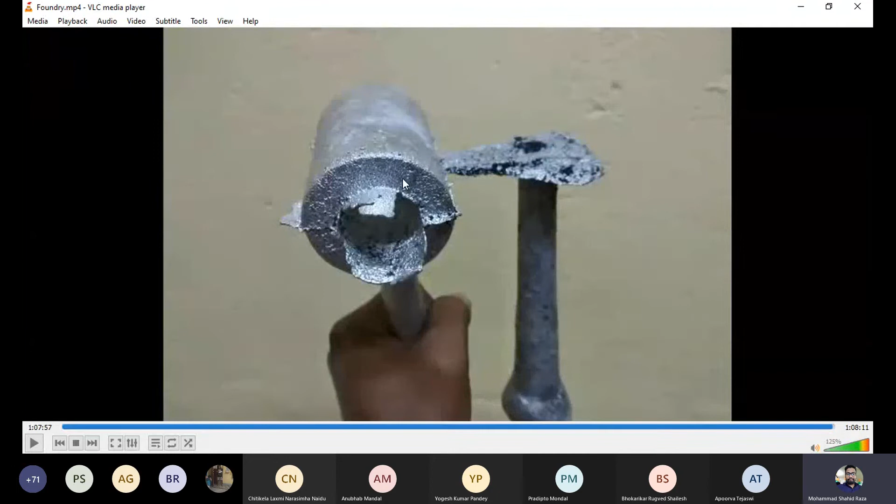I think this much only. This is the top view of what you did. So from here you pour the material, it went inside, and through the channel it solidified over here. Now one thing you have to understand, it will come in later slides: the shape of this sprue is tapered. Keep it in mind, wherever the liquid is flowing, we have given a tapered shape.

So this completes your video.

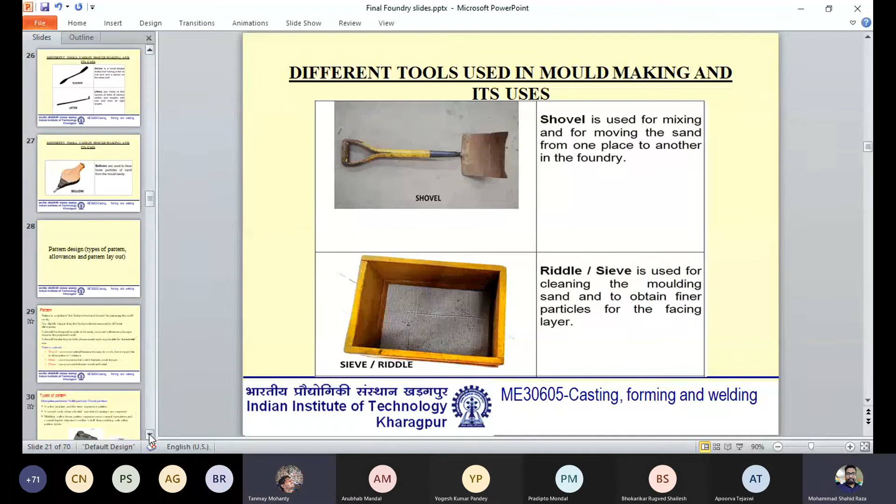So up to here it's okay, students? Sir, I could not understand the design of the last mold. Were we making a cylinder with a hole inside? Yes, we were making a cylinder with a hole inside. Okay sir, so for that how will you make a hole? You have to keep something so that liquid metal should not get into it. That's something we call core. Core is also compacted sand like the mold, and we are placing it at the center.

Sir, it was inside the two wooden pieces? It was already inside the two wooden pieces? No, that wooden piece was used to make the cavity. So how does the core hang in the center? You need to provide some part of the sand also as a support. Yes sir. Just think in your mind a simply supported structure in the center.

So for simple supporting from both ends, we had some extra parts lying. What you did, that black portion of the pattern you saw there - there was a red part and a black part. That black part was the dimension of the core. So in this video they didn't show you how they put the core. They had an already made core, they know for this lab they have made it and they are placing it in the center.

So core is made of wood only? Sand, same sand? No, that's not wood - that's not a part of pattern, that's a part of mold. Yes sir. Mold and core, though both are same thing. Just the difference is core is in the center for making some hollow structure. Pattern is something which we are removing, it will not lie in the final melting process. Just to give the shape and size of the cavity we are using pattern. That part was not present in the video, how he placed the core - that's why that confusion is coming.

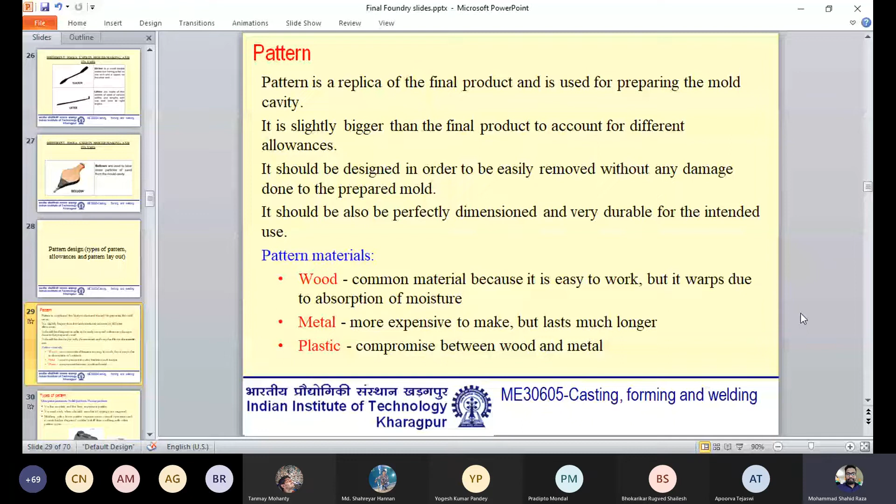Now types of pattern - he went through these slides in your video also, showing a solid pattern and a split pattern. I think the third experiment he did, the pattern was split into two parts, one in cope and one in drag. That experiment belonged to a split pattern.

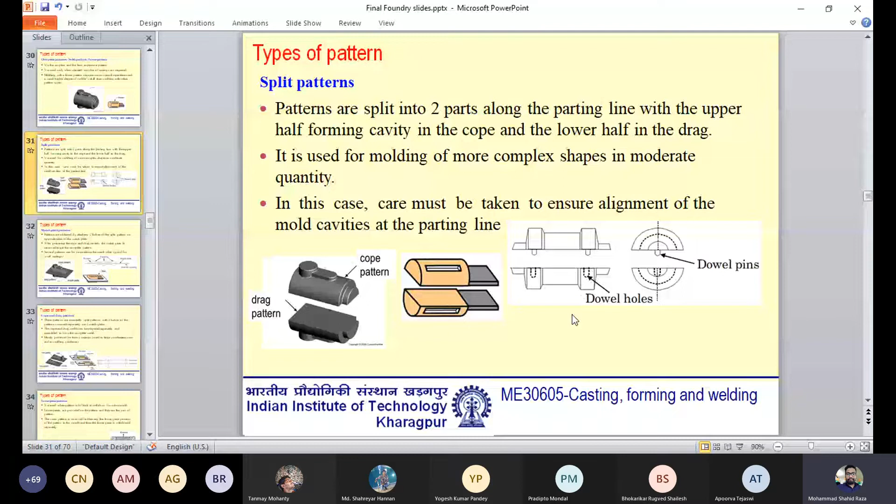So this is also one type of pattern. Basically the types of pattern depend on your requirement, what sort of structure you want to form - all structures cannot be made with the same type of pattern, so whichever is easiest for you, you go for that. Similarly for cope and drag or split pattern, every arrangement is present in it, like the riser arrangement, and the riser location is fixed with the help of that pattern only.

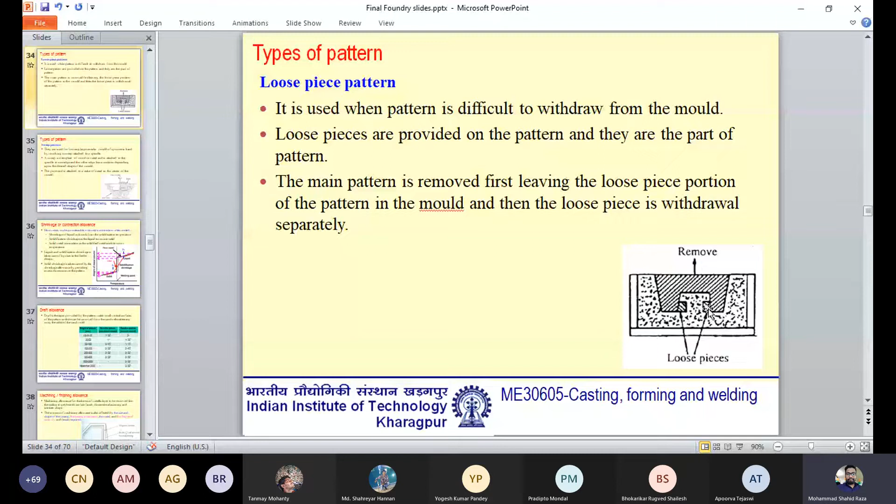Now loose piece pattern. Let's say there's this hatched portion with some intricate profile that's difficult to make loose. What will you do? You cannot remove this directly - once made, if you try to remove it, the sand will fall down or break. So what we do is make it in the form of loose pieces, which remain in place while you remove the main pattern, forming the cavity. Then you remove these loose pieces from the sides. That's why we make it loose, so you can remove the pattern in two ways - first the main part, then after the cavity forms, you remove the loose pieces.

Sweep pattern is something - let's say if you want to make a cavity, what does a pattern basically do? All types of pattern do one thing: they make a desired cavity. Whatever way you select to make the cavity becomes one of the types of pattern. Here, let's say this sweep is made of wood, and you want to make a uniform, symmetric circular mold.

There is a symmetry between this right half and left half. So what you will do is put the sweep inside this and rotate it. Once you rotate it, it will remove the sand. After some rotation, remove the sand material, then rotate it again. So after a few steps, you will find the cavity of the same dimension as this sweep. So we call it a sweep pattern. This is also one of the aspects.

Using this, you can make a symmetric kind of mold or cavity. Now, after all these types of pattern, we have to give some allowances in the final pattern. Why? Because, as I told you, when the temperature changes, shrinkage in the material takes place. That shrinkage you have to incorporate. How much shrinkage for what material takes place, through this diagram try to understand.

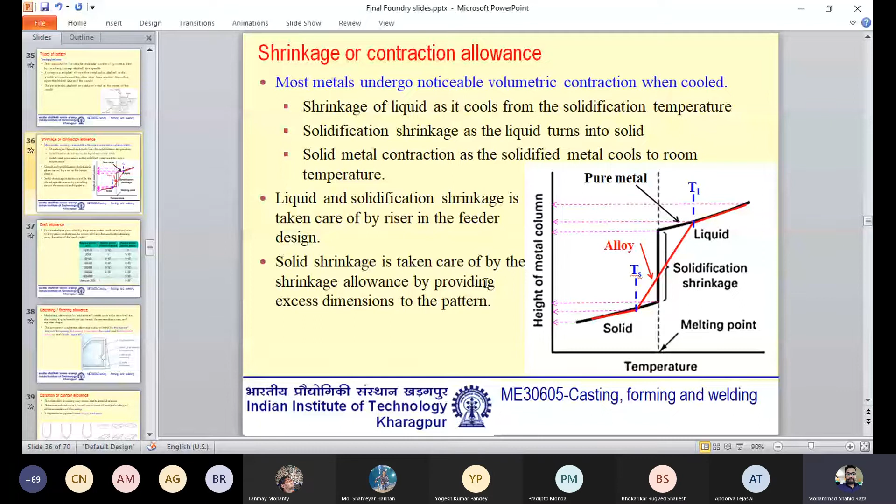Okay, now draft allowance. Draft is the taper provided by... does anyone want to ask anything?

Yes sir, I had a doubt. Why are we using the riser feed especially? We also have extra material in the sprue part and the gating part, right? So will that not suffice for any extra material required?

That is okay, but what happens when the solidification takes place? It is not so that always the gating part will fill the farthest most point, the extreme most point. Let's say the gate is present on one side of your casting, and the requirement of material is on the other side. So that liquid metal will have to flow up to there, then only it can fill. And in that case, if some solidification has taken place in the path of that flow, then it cannot fill those parts. So what we are doing, we are always trying to put the riser in such a way so that it covers all the part.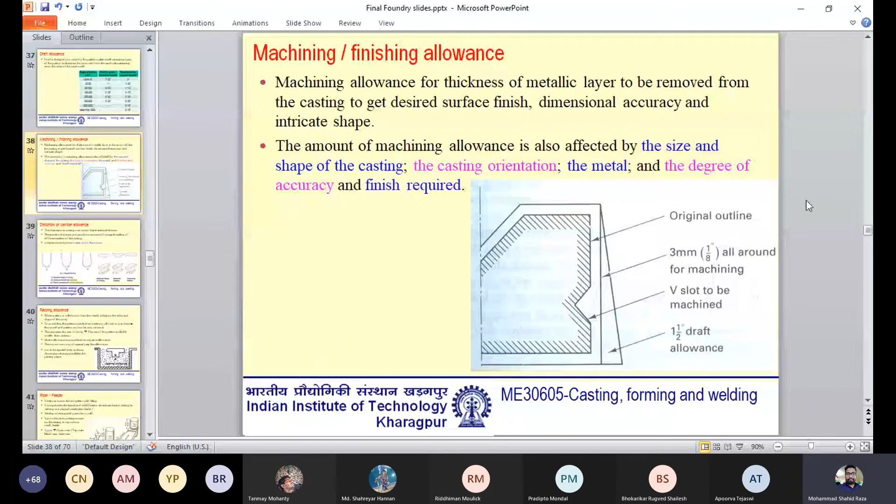Now, distortion or camber allowance. Sometimes some distortion takes place while cooling - there is unequal stress in the material, and it will bend. So if you know that, if I make the pattern straight, the casting will get distorted like this. So in order to make this straight, you allow some deformation in the pattern itself, so that after that distortion, it becomes more or less straight. So you are taking care of everything in the pattern only - shape and size factor, whatever you require, you give all the allowances in the pattern.

Rapping also - like to take it out, he was hammering it. If you have seen, slowly he was hammering it after applying the pin. So some allowance is given for rapping also.

Now riser feeder - a lot of questions came on this. You can understand from this figure that the riser is very important, so that every liquid metal can reach or be fed to all of the casting equally. It's not that one portion will receive and another portion will not receive. So for that we are keeping risers also.

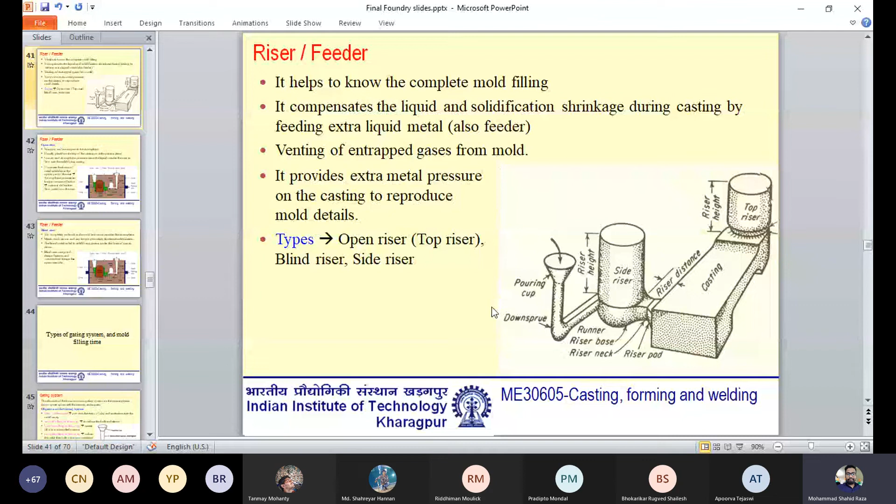There are types of risers: open riser, blind riser, side riser, based on the requirement. What sort of requirement is there? See, open riser, whatever we showed you in our lab, that was an open riser because that end was open.

If you pour liquid from one end, this is a blind riser, and after this it will reach the sand. This will incorporate whatever gases get generated, through this as well as through the vent, and one riser is required for this portion. Why are they using two risers?

Here you can see that the core is blocking that part. So I think in this figure, that's why they put two risers. So based on your pattern, or the part you require, we are putting the risers.

Blind riser means this closed one, not exposed to the atmosphere, and it stays. What is the benefit? Metal cools slower and stays longer, promoting directional solidification. If it is a blind riser, it will help in slow cooling. With slow cooling, directional solidification can take place and maintain heat longer. See the difference: it is written that blind risers are a good design feature and maintain heat longer than open risers.

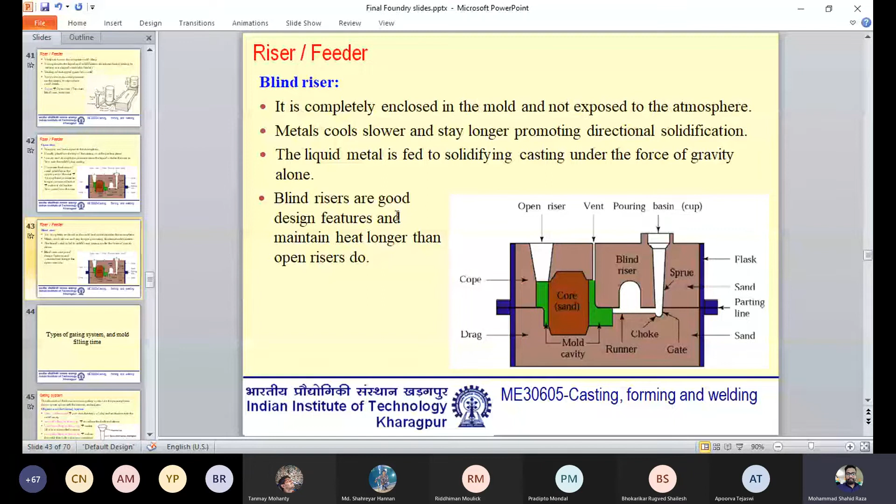A gating system, this you already saw: pouring cup, sprue, pouring basin, runner, and gate, so that it can enter into the cast material. So this is the overview of the gating system.

What are the objectives? First is to clean the molten metal, so that if any impurity may fall below, it should get trapped. Sometimes in this bottom portion, in some arrangement called skim bob, we give a place where they can get trapped. Smooth filling of the cavity - the cavity should get filled in a smooth way, there should not be turbulence in the liquid, otherwise gases will get trapped inside it. That is one objective. Uniform filling of the cavity, complete filling of the cavity - all this will be ensured through the gating system.

Parts of the gating system, I think you already got this through the various slides: pouring basin, sprue. Sprue well is the bottom portion which has got a depression so that some heavier particles can settle down over here. Then the runner part and ingates.

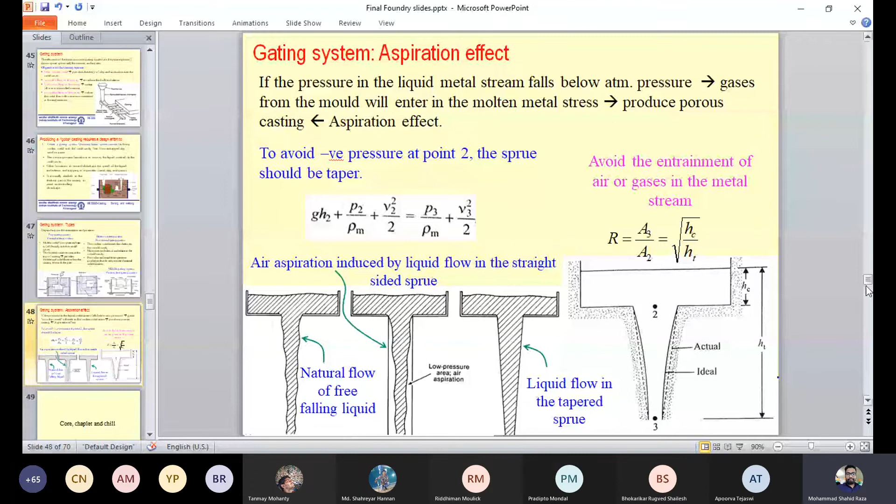Here there is a pore - sorry, there is a blind hole. This blind hole you want to make. So in the pattern, what you did was make some arrangement called a core. This core will get inside and will prevent liquid metal, so that the replica will form, and there will be a hollow portion over there.

Now these are some of the properties of core. Types of core.

Sir, but if we put core in the sand, then how can we remove the core out while putting the molten metal? Because it's like a complicated shape. Now, if we remove it, then all the sand above it will also get removed.

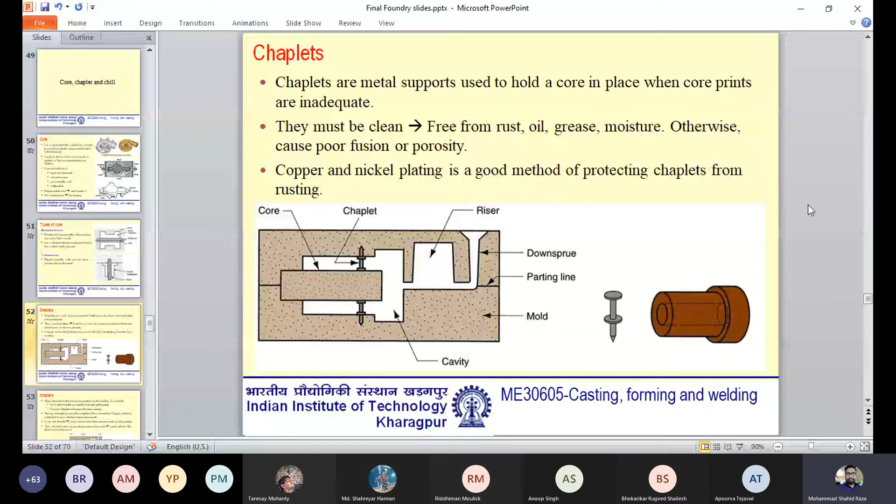It's written, how will we remove the sand which is in the center of the sphere? That is an issue, like how we will remove the sand that is in the center.

For that we need to provide some extra space. We have to make a trade-off sort of thing. We will make a position where some hole should be there, an extra hole in the final product. That hole we can fill through molten material at a later stage, like through welding. You can fill that using a filler rod.

Understood? In that case, is it not possible to remove the sand? So you have to do some trade-off. You cannot avoid it; post-processing should take place, and you have to fill that position.

Chills. Now, chills - this is an important term. You should understand that cooling is like, it doesn't depend on you. The cooling of the material takes place in the cavity. So if you want to provide some directional cooling, you want some place where cooling should be fast, or the solidification should be at a higher rate, and some portion solidification should be at a lower rate.

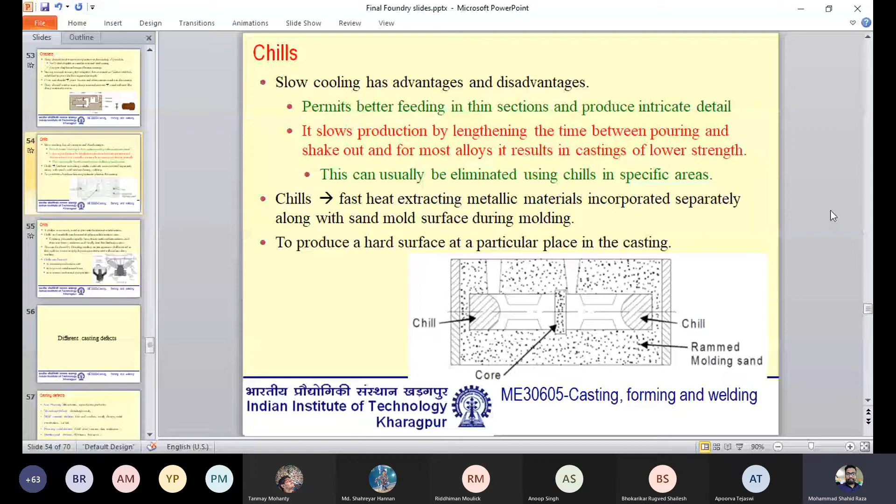So basically why do defects occur? Because of gas - sometimes some gases get produced, those get trapped inside, there is no proper ventilation available. So what will happen, those gases will form holes, sometimes open, sometimes closed, and that will cause defects. You do not want porosity in the final product.

Shrinkage - you take care of everything everywhere, but let's say you missed some points, and because of that, shrinkage of the material took place. Let's say the riser was not at the correct position, so it made a cavity - that cavity is called a shrinkage cavity. Mold material defect - what was the material we were using? Green sand mold.

That material hasn't got a proper combination of clay, water, and sand, and because of that, while doing casting, some part got washed away, some dropped, some penetration of metal took place inside it. Those causes are mold material defects.

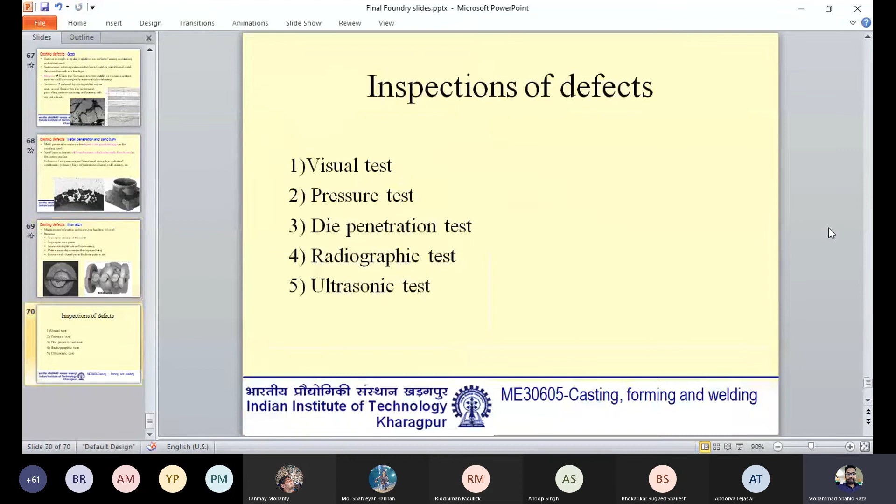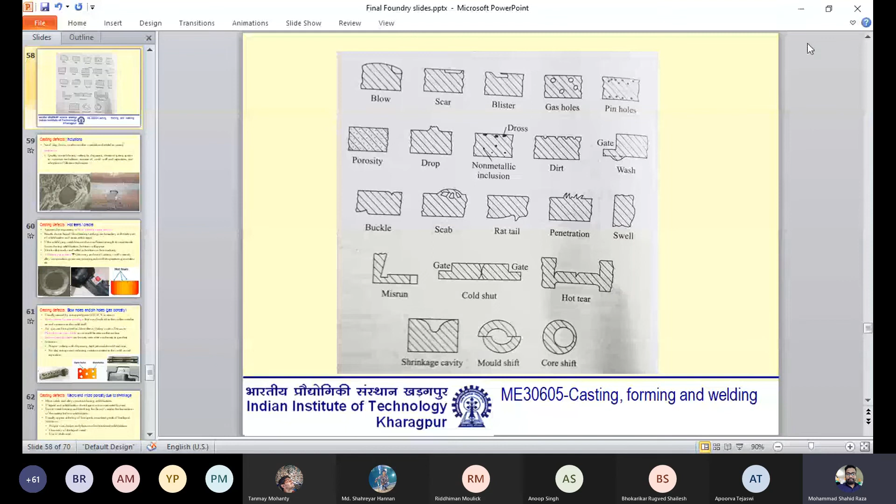So students, this completes our slides. For the theory part, we have to cover a lot of things. And for the defects part, I didn't go into detail of each and every defect, so you can go through them and ask anything in the chat box also. In future also, if you face any problem, you can ask about it. And related question answers are there in another slide - those basically are the generalized questions.

If you want to ask something, ask, and just look at those slides also. Let me show you some slides related to questions. You want to ask anything? Anyone?

Okay. Sir, I have a doubt. Ask. Sir, you explained so many features, but most of them weren't used in the product made in the video. So is there any such thing that some features are only used in theory?

What happened is, for lab explanation, we got only 3 hours of lab to show you a product, and for that we intentionally selected the easiest parts. Since you are in the first year, I think for basics you need to understand those things first, and since most of you have not seen any casting process before, we tried to show you the simplest lab experiments because it is time consuming.

But for the theory part, we tried to cover different features also, so that in future, if you get some curiosity related to casting and go for some videos or a book, it will be easier for you to understand, since these things were taught in class, and you can easily grasp the topics.